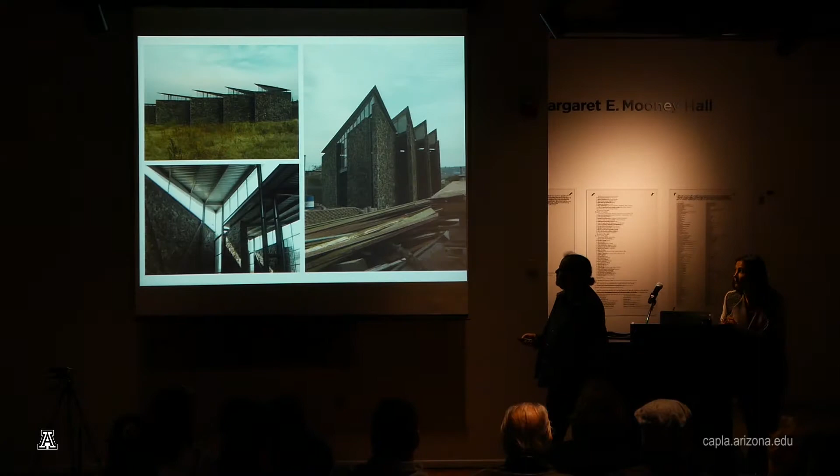For example, this is a place, a working shop, that has carpenters, painters, many people that work for, how do you say, a municipio, like a government place.

And then, how can we work with the same economical money that they use to do a really very industrial building?

So we decided to use volcanic stones, and then we began to really figure out how to make the structure more light, and to know how the materials work.

We really like this kind of image, because you can see how everything works, and how we can get the light, and at the same time have a strong building where all the chaotic things, accidents, can happen together.

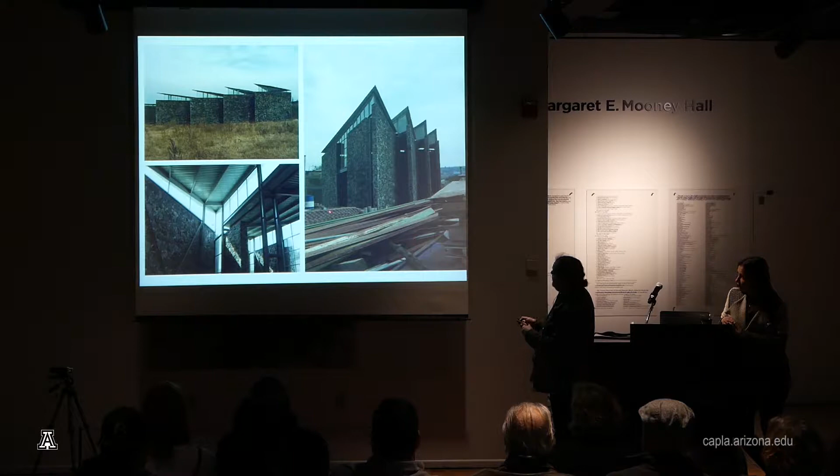The accidents can happen there and be together.

Or this market—we even won a prize with this market, but it's nice because this prize, the Bienal of Mexican Architecture, is usually for big projects, and we went with this very little market.

It's important for our generation, my generation and your generation, because then people say we can do public buildings.

So in this case we talked with the people a lot, about how they really need a market. We decided to make a market where the difference in the height of the roof can remember the tianguis, the old markets.

We see these old markets all over the world, like the popular markets, and how the wind can cross through, facing south and north so you don't get direct sun, and then you can have very nice light inside, and the people can really begin to change.

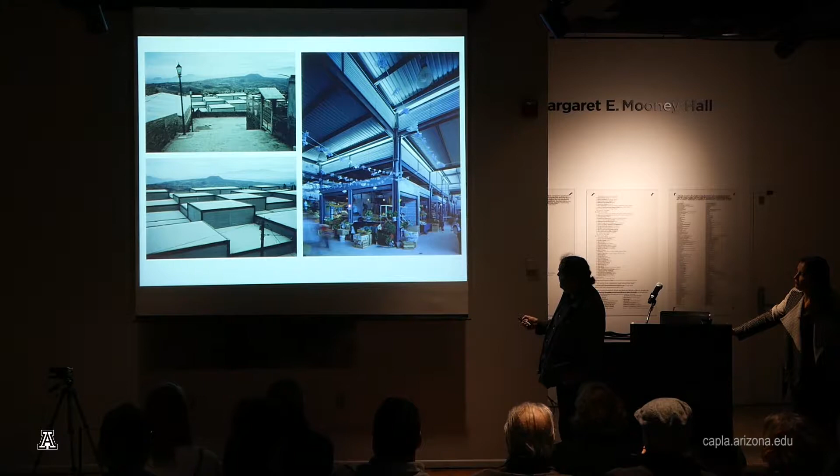One more time, the accident is important, how they can leave the place. Or in this case, we made a school for blind people.

The problem is to understand the other senses—how you touch, how you smell, the textures, everything. So that's why we decided to do something where the sound of the water, the smell of the gardens.

The texture of the materials can be part of it, or even the contrast between shadow and sun can help—not even just the blind people, more for people that are almost blind, that have low vision.

So we worked on that, and on the other hand, how can we play with the same materials, traditional materials like tepetate, which is earth—but you cut that earth and use it. It's not expensive, you can use it.

How can we put it at different heights? So that's, I think, what is contemporary—like in another project with volcanic rock, with tepetate, how you can make those elements work differently. And 4 or 5 materials, that's very important.

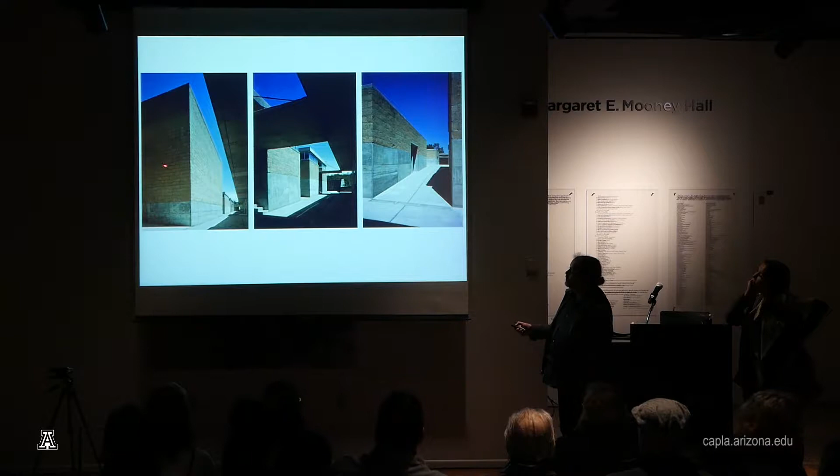That you cannot see in these traditional tepetate buildings, but we can do it under other conditions. The construction quality isn't good, so once more the strategy was how to use tepetate, and with that same tepetate material make the texture of everything.

For example, the School of Arts, we made our first project from earth. The thing about that school is we wanted to make it from earth before doing another project in San Miguel de Allende. So we really looked at what happened here in Arizona, in Tucson, with the wonderful work of Rick Joy, which we respect a lot.

And then how can we do this? We have some people from here that helped us a lot to know how to make it. And then, what is happening in Mexico? They say, okay, you want to make this project? We have 1 month to have the project and 10 months to finish the project.

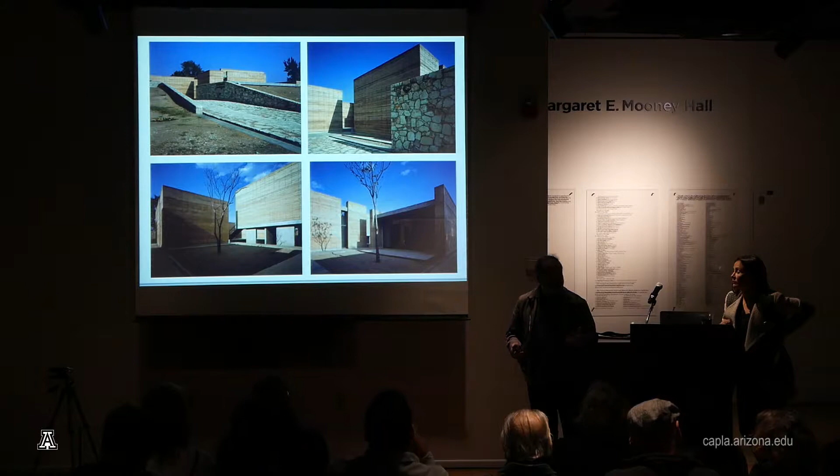It's amazing - like, okay, if we don't do it, somebody will do it. So we made it, and in 1 year we built this project to 2,500 square meters, and because there are different buildings, we could work on them at the same time. That's how we made the rammed earth there. We learned to make it at the same time, but we have that kind of liberty in Mexico - we have to understand how to make this kind of work with these local materials.

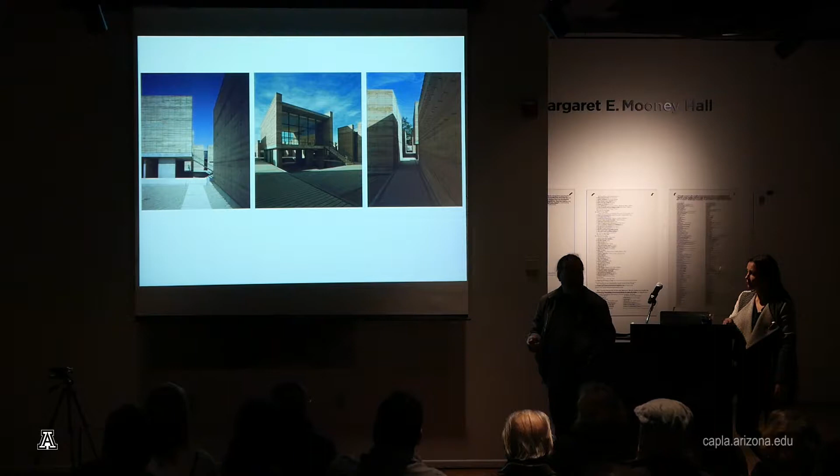We really like working with this kind of material because we love to work with the structure. In Mexico there are a lot of earthquakes, so we can make something to withstand the earthquake because of the size and direction of the concrete, and then we can really build these heavy rammed earth walls at other levels. So how can you really reconstruct the idea of lighting, or the gravity of the material going somewhere? I think you will see it in our work.

As Mauricio said, we want to share this with you as chapters, about ideas that we really love and that make us think a lot, and that make us really happy to work with. So we chose some of the projects, and some of the ideas we love to work with involve topography. We always use it as a strategy - we love strategies in every sense.

As Mauricio showed with the School of Arts, in a way it was also an opportunity, because the site where we were working used to be completely flat, one level. And at that point, as he said, we didn't have any money. What we had was an opportunity - this was a public school, and they were building this reservoir nearby, and taking off a lot of earth from the site. So for us it was like, take that earth to our site and let's try to transform all of these buildings.

We didn't want to have a building at all - we wanted to construct a garden, a whole garden crater. Once you were inside, you could discover the building itself. So again, this was an opportunity for us to understand that taking off all that earth would cost a lot of money for the school, and what we chose was to take that earth and transform the territory.

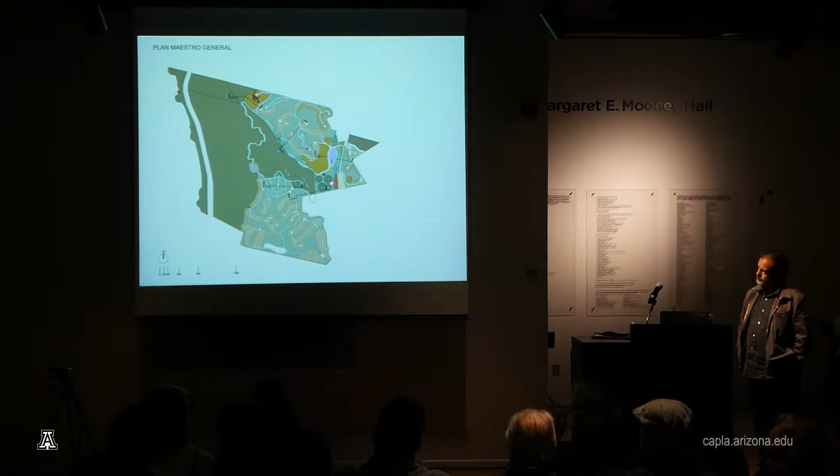This is a very huge territory, almost 100,000 acres. What we've been doing is small interventions across the whole site, and at first we tried to understand where to work, because we needed to design a very small building - a winery, only 200 square meters, which was really small for the size of the site. What we did was always try to understand the north, the south, the sun, the sky - even the stars in this place are really great.

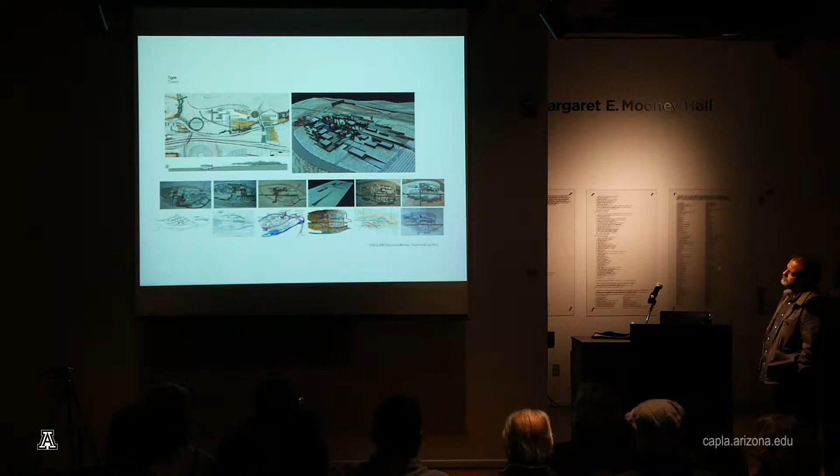Then we understood that there were some olive trees which formed a perfect grid, which was mirrored by the grid of the vineyards. What we did was create a very small building, again understanding the materiality we had, but also playing with a building that was really small while figuring out how to dialogue with the landscape.

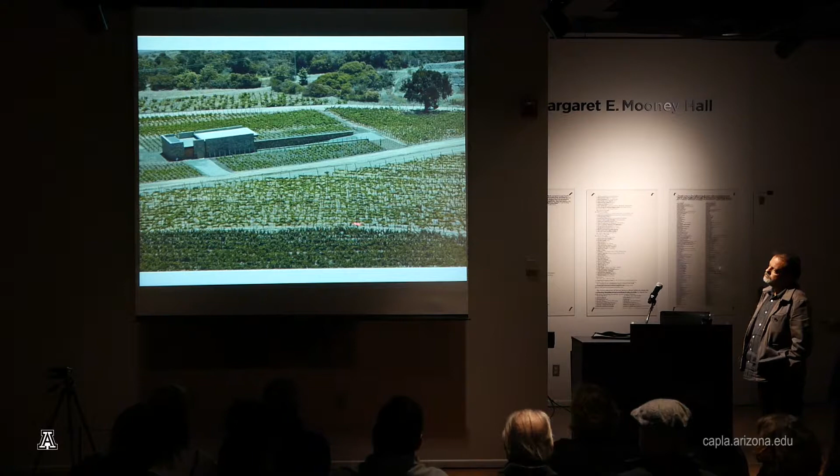We are marveled all the time with the beauty of the sea, of the mountains in this case, and we wanted to grab all the vineyards and take them into our building. As our building should be very close, we thought we would work with the gravity and with the section.

And understanding very simple platforms, the programming of the building itself, and then how at the level of the eyes we could open the building and connect with the landscape. We always want to do landscape instead of doing buildings. We really love this relationship where the building disappears, and what happens is the garden gets inside. All these lines of vineyards became part of the space itself, and now it's an exciting place where weddings happen. It is almost not a winery, it's also a showroom. It's a very flexible space.

The people doing the wine hate us because there's a lot of light going inside the building, but at the end we managed to control it and make it more part of the mountains and what was going on there. We do all these small strategies, but this is very pre-Hispanic from our point of view. We have that influence of just going down 1 meter maybe, and even though you think things don't happen, everything transforms from our point of view.

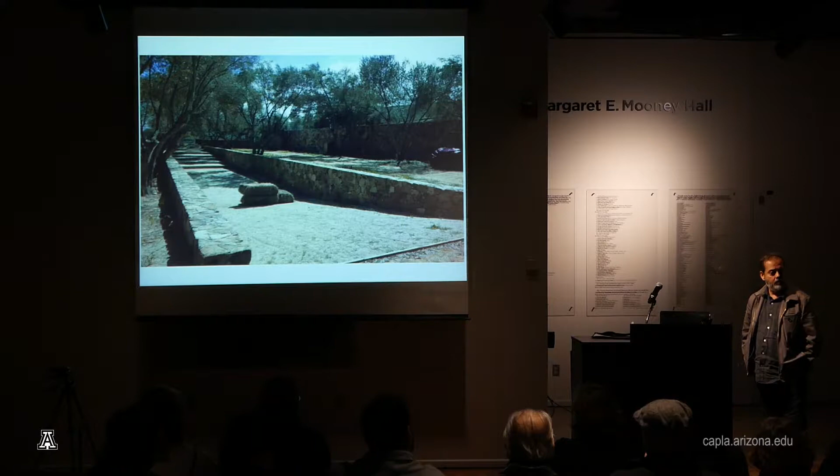Again, understanding the site and the topography of that site, which was really small - this is almost 3 meters high. We developed some gardens of water, which in the real life program is a bathroom, and of course we didn't want to do bathrooms that look like bathrooms. We managed to create a garden of water, then the private space, and then kind of a cinema. Then some structure that disappeared with the landscape again, dialoguing with the topography.

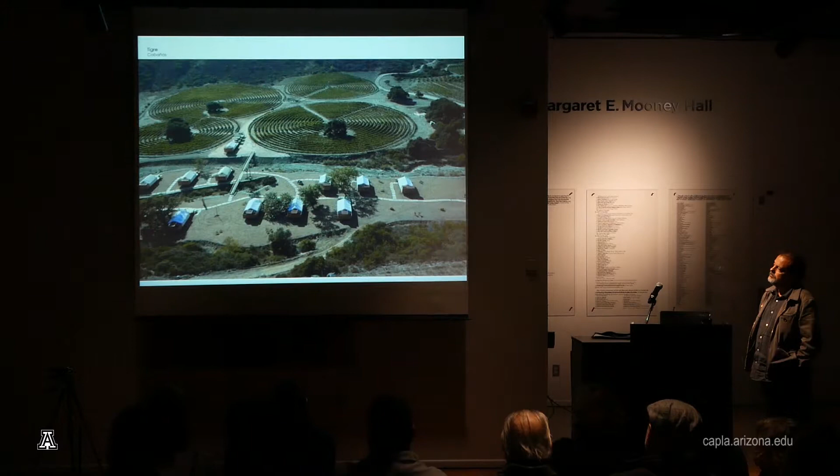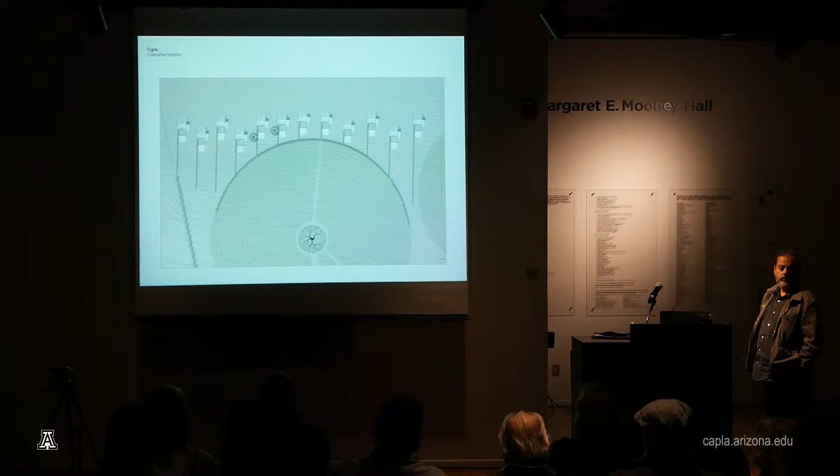And then we did bigger structures, so it is a very nice place where we could experiment with different scale elements. In this case, some cabanas, where the landscape and the vineyards became the vestibule of the hotel, and now we're building other cabanas on the other side. So again, in a space which was already the landscape, we could create something very spectacular - a camp on one side, and on the other something that explodes the architectural experience of living almost outside, creating platforms which dialogue with the mountain.

Here we had two things we wanted to explore: how to get to the ceiling of this room, taking advantage of the mountain itself - so the topographical strategy was important. And second, how to take up two walls which would create a private space up there, so people can spend the night there, because there's no rain at all in Ensenada. So we could create a private, intimate space where people can do whatever they want.

Whatever. Yeah, this is the chance. I mean, this time was so great, and we were just saying that they can spend the night there, and we want them to walk, to have a bath, a shower outside, and be seeing each other from one cabana to the other. And this guy was like, yes, that's so amazing.

So we think we had a crazy client, and we took advantage of that. He also wanted to place, for example, some horses there in the middle of the mountain with a great difference of levels, and we said, how can we do that? We have the freeway here, and we made like a big hole, but again, how to do 16 meter high walls without being so expensive.

We understood the natural angle of the earth, and we worked with that - we just poured concrete and stone, and with that we built some carved element that took off the freeway from our view. Considering that the height of the people in that space would be over a horse, we created that 3-meter height more or less, and took off and just framed the mountains, which is so beautiful.

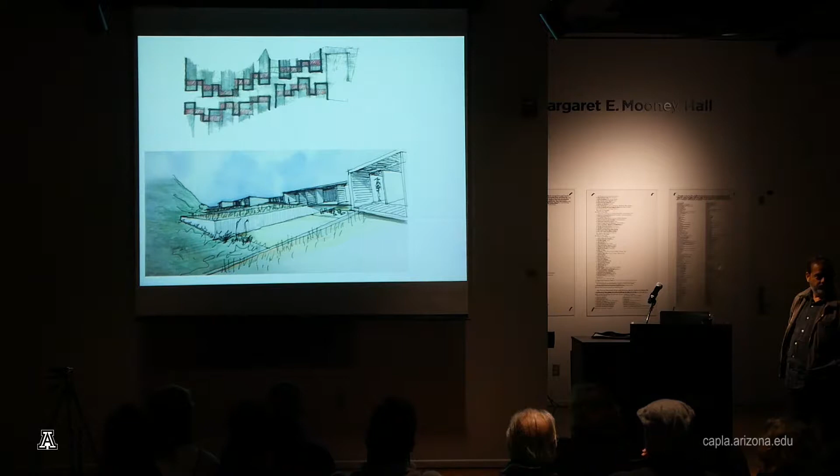So every strategy in this project has to do with that - how to disappear the architecture, how to make this housing project, which is 15 houses exactly the same, never feel that there are 15 houses, never feel that they are houses, always feel that they are almost part of this topography of vineyards. The same we did with the hotel, almost floating without touching the nature.

It is very beautiful, a very similar desert vegetation, very small one, so the architecture becomes very protagonic. So how can we make these mountains be part of the architecture itself.

A lot of people ask us why we don't do organic architecture. And we say, look at that. It's so organic. All these curves and all these straight lines, they're all part of the same thing.

This is a strategy we place in our lab projects, or we like to place with them and play with them. For example, this is a house done in Mazunte, which has almost 35 meters height difference between one spot and the other. What's important is that even though there's almost 1,000 square meters built on this land, you never know it, because we always compose.

In this case, we have the trees, and we wanted to be at that height. But if you see with precision, we are almost 12 meters over the soil, over the fold, and you never feel that. You never need a handrail, even though our clients said, when guys are having drinks or smoking some pot, they're gonna fall. And he said, no, don't worry, the trees will help. We hope. We'll see.

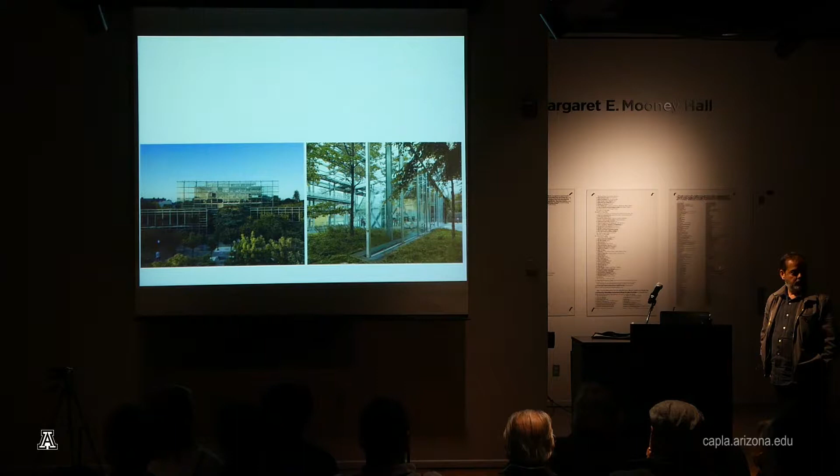So we started the same way, and we want to talk about process. We had to work in our favorite building of Jean Nouvel, which is the Fondation Cartier. They invited us to develop a project, the scenography for the Great Animal Orchestra, because we were used to playing with things that have to do with sounds and things for people who don't see.

So what we thought at the beginning was, well, if we need to work with the orchestra of animals and show videos, pictures, paintings, we want to relate the first floor to the garden. For us, that ground floor level is such amazing, and we wanted to incorporate the organic stuff, so we thought of one material to do everything. At the beginning, we thought of a great circle of brick, just a big topography in small scale to show benches, walls, to show the paintings, the big paintings, to incorporate the art with Adriana Varejão.

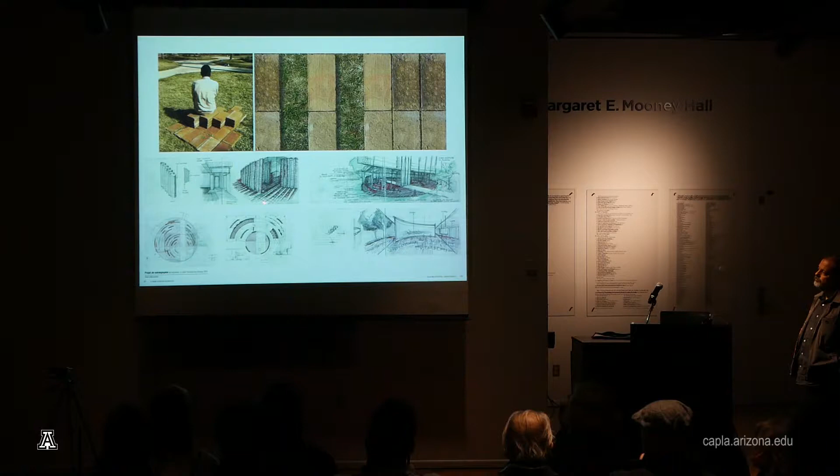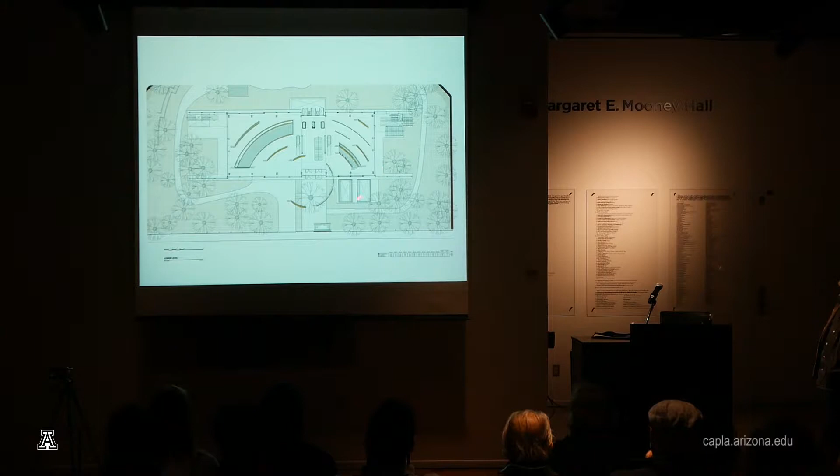We worked the piece. At the end, there were so many bricks that we needed in a short period of time, but we finally managed to create this, and it is an echo of the garden at the same time. We wanted to incorporate people walking through the space, but always seeing the things, not knowing if you were outside or inside, not knowing if you were in front or outside.

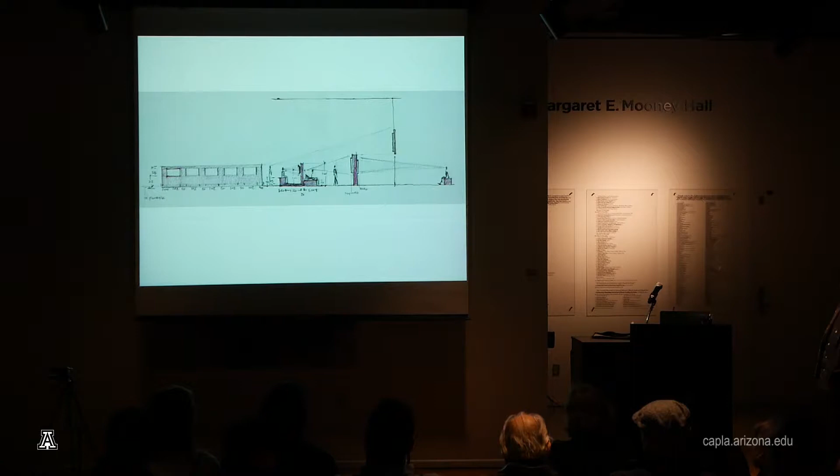But this is pretty much the same scheme as how we compose our architecture, because these paintings could be seen from far away since they were big icons, symbols almost, and we wanted the people to see it because they are part of the Great Animal Orchestra too. So this would be like the scenario.

We wanted to make the glass disappear. We wanted to make it connect to the garden and be part of it in a way. Something also important in our work is to break limits. All the time we are exploring ways to open up our projects.

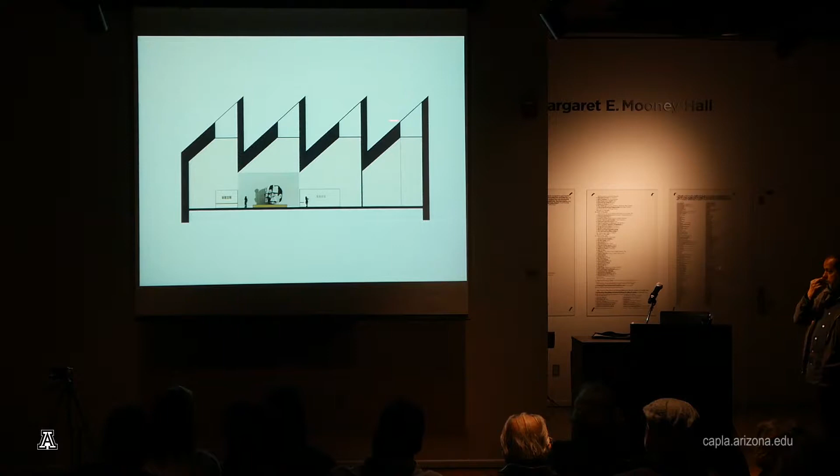In our last project about ephemeral work, we worked on the Jumex, which is a Chipperfield building in Mexico City. In this case, it had a very complex, very steep ceiling with all these elements. And Ulises Carrión, a great Mexican artist, sorry—

He wanted to say that art should be for everyone, should be touched. So we decided we would do a library, and everything would be done in wood, with tables for people to sit and feel comfortable opening the books and feel free to work with them. But also, again, there's the thing of framing—in this case framing the text, framing the books.

As I said before with the students, the materials are just tools. Again, of course we worked first with brick, then we worked with wood in this case, and at the end, for example, in Hermès in Italy, we decided to work with tepetate. Tepetate is a material you've seen in the School for Blind People—we have worked with that, and as Mauricio said, this earth cotton in bricks. We had this project with Hermès. We won the competition, fighting against Francis Kéré. So it was an honor to win.

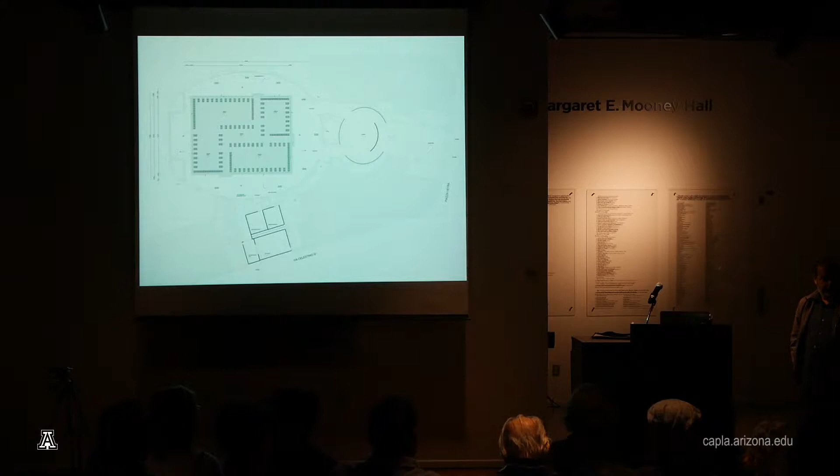Raw. And in one moment they say, make something with raw earth. But they really need something to make it in 2 weeks, and then to put away in 2 weeks. So that's why earth kind of fit. But again, this was an opportunity to explore for us. We want to work with earth, but we need to build it and unbuild it in such a short time.

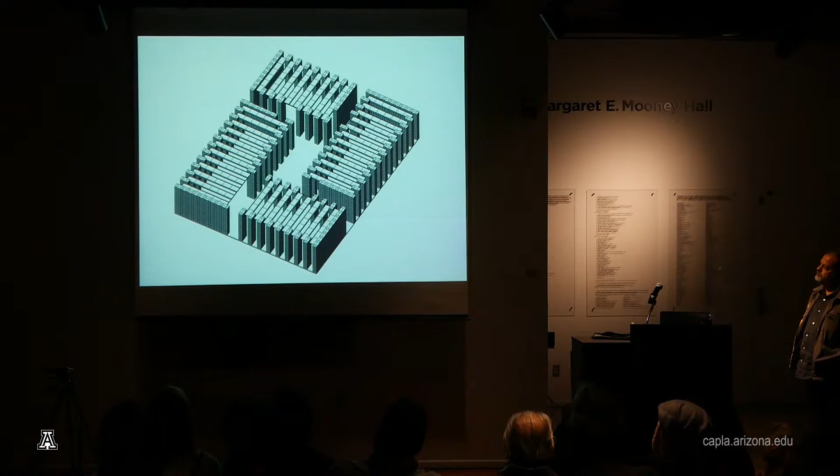What we did is we wanted to work with 3 saloons and then a patio in the middle, and then again with this idea of building columns, very deep columns. But it was a theater, and there was a parking area down there, so every column we designed was like 64 tons each. Of course, the Italians said, 'Why? We can do it with cardboard, very light. We can build it in 2 seconds.'

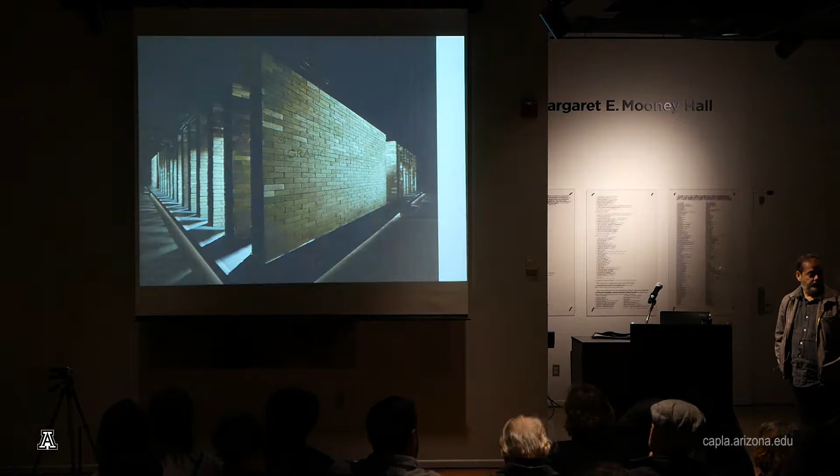We first say, okay, we can put the tepetate, but it's very expensive. We could go to Mexico, to Italy with the tepetate and still it's not economical. But we made investigation and we know that in Italy, in the south, they really worked with this same material. They didn't work with it anymore. Like in Mexico, this is material that they never use again, but this is the tufo. And the tufo is the same as the tepetate, just called different in many different places.

But right, how come this material nobody uses anymore? It's not expensive, you can use it. And then we say, okay, the same one you use in Napoli, that's all. And we put it in Milan and it's nice, because then, right, we use the local materials with the same properties as this, no?

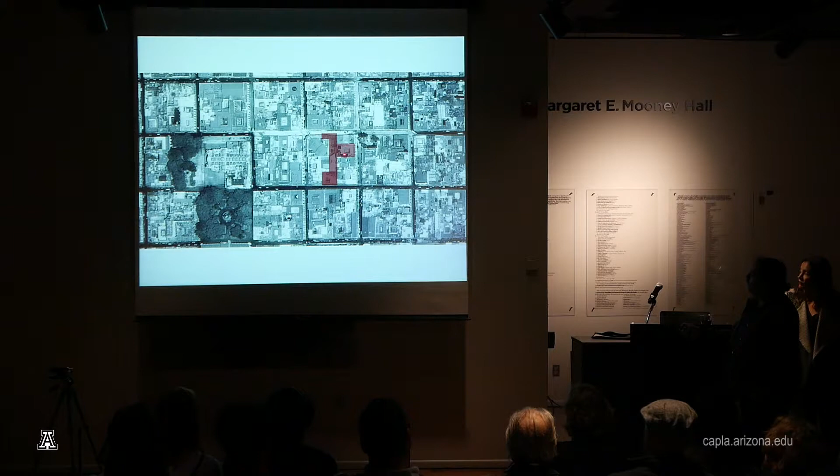How can you really make a cultural program inside? This is the place, this is the new facade from the 19th century, covering the 16th century convent. It was confusing because now it's a hotel and we don't know really where the original place is. So beginning to work there with a lot of people from restoration and archaeology, we began to understand that we had to make an empty space here to remember, and to have once more the facade and the street inside, because we had drawings that showed us how it happened.

This was the place before - nothing, a parking lot. Nobody knew it was a convent. So we began to remove things to understand. Even here, the client began to buy the different parts of what is now the cultural center, piece by piece, like jazz. They'd say, okay, we buy this.

We wanted once more to make a strategy to begin to change it, and we decided the 21st century part has to be steel, glass, very light, because the materiality of history is already in the existing structure. So finally we put in this place that is nice because now it's a public space in a private building. People really work here, and now we have once more the facade of the convent.

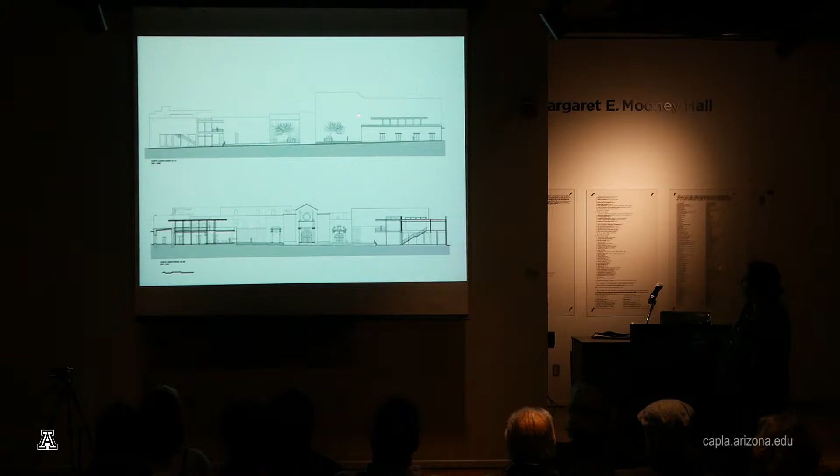As we told you, we make these kinds of acupunctures with new architecture to create the program - sometimes a restaurant, an office, a gallery here, and then in the convent we have the public space where people can really walk, just to walk, even if you don't want to go to the cultural center - you're making city.

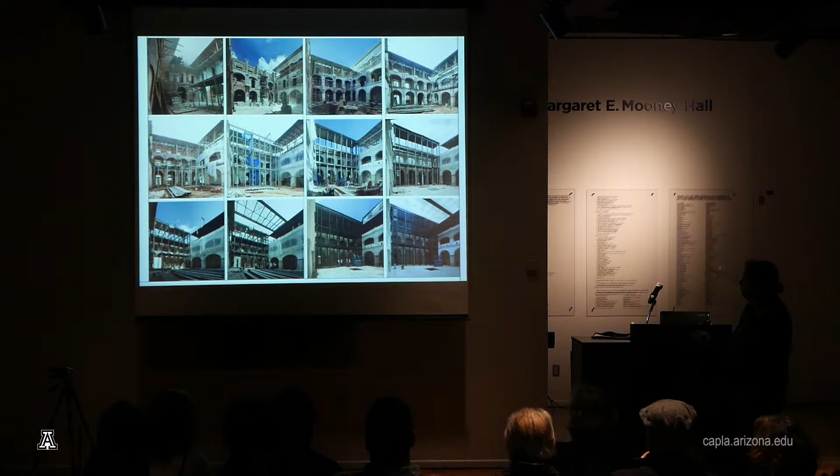And then we took out all the hotel construction that was there, and when we finished that, the only way to put in the new part, because we had almost nothing left to make the library, was to have a contemporary construction there. That's how we really made this. In Mexico, to make something like that was almost impossible at that moment, because the resistance to this contemporary thing was very strong.

But at the same time, because we made dialogue with the authorities, we told them if we don't make this, they will not put the money for the restoration of the other things. That's how we found the place, like a hotel, and that's how we cleaned everything and put in all the new things. Even we made this - remember the roof was from the 17th century, and then in the last part we made it with a darker wood for the new part.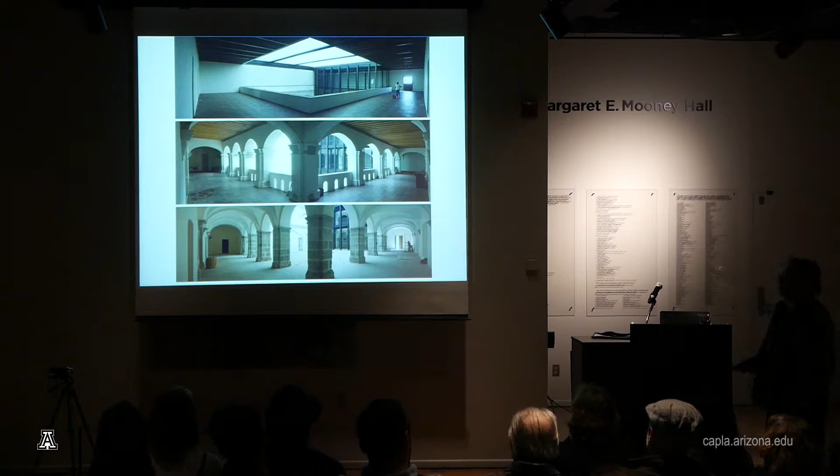This helps to understand where the contemporary part was. It's very important how technology gives the possibility to not have columns, so this roof makes the shadow for a portico for our client, without columns, giving the opportunity to be really next to the heavy walls of the convent. Then we can make the library, we can make a double space. So this is the new part, this is the last part, and how can you make the program now?

We can move the ceiling, so even if it's not raining and there's no sun, it's nice here, or we can do it like this.

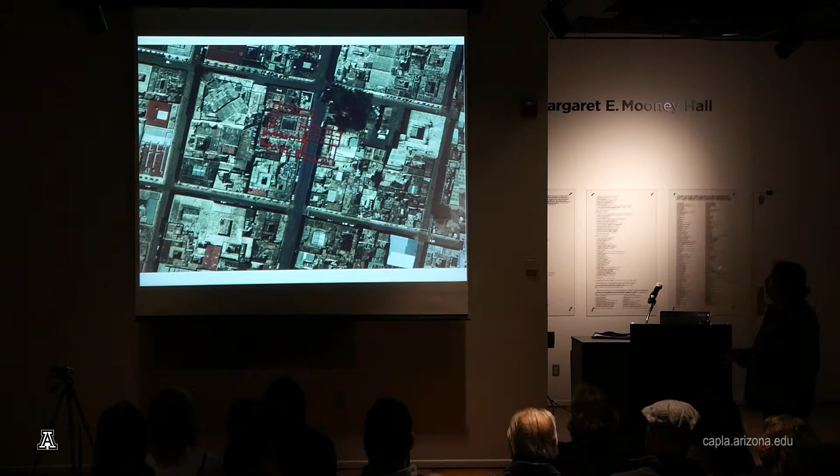Like I said before, that was a convent. In the 19th century, they put this away. We found there really was a convent there because they were changing the street, but we asked them if they could really move and keep the convent.

They said no, we know there is the possibility, we will see in the future, but now it's impossible. So this was the convent, and then because we have the shade, because we have this street inside, we told the client we don't need anymore the facade from the 19th century. We really want to have the idea here of the cut of the 16th and 17th century convent.

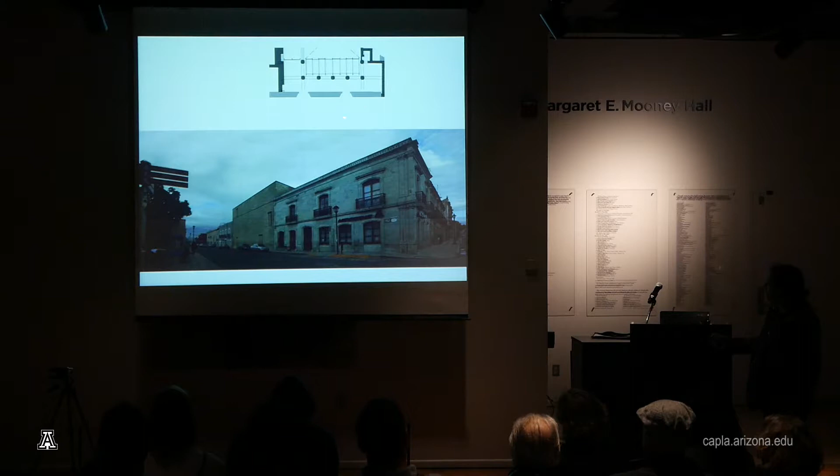So understand, we have the possibility to change. Here you have the portico, the side, and then here before were the rooms. We lost the rooms, so we said, why don't we keep the memory of the cut? That's why we have the doors aligned to get to the rooms, because this part is new, because the convent was only this element, but we don't want to make something that will be very aggressive outside.

We want to make a very monolithic piece to remember the Santo Domingo convents, the Dominicanos convents. Yes, it's a contemporary piece, it's true, but at the same time it's the opportunity to remember what happened in the place. It was very polemic.

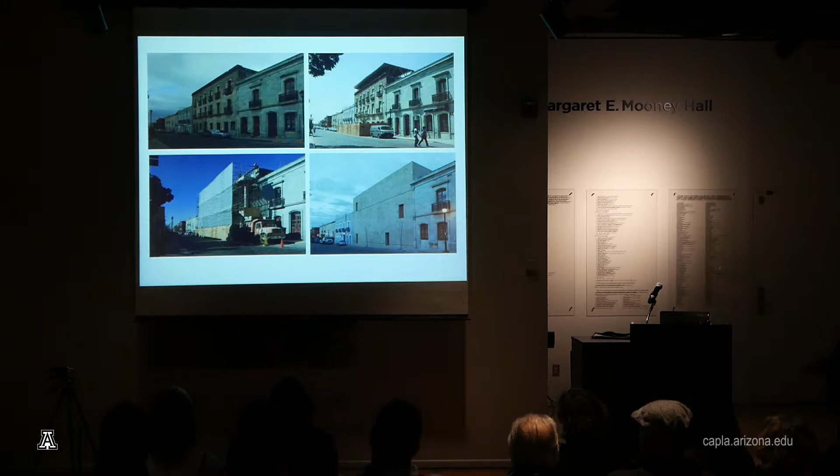But really, we play with beautiful stones, with people working these stones, and we make this piece there. And as I say, we make a public place with the gallery, restaurant, and the cultural center. Every part we go, we make this kind of acupuncture to bridge between the 19th and 17th century. We change some 20th century parts that want to look colonial, but we make something more light to really be doing something not noisy, but new.

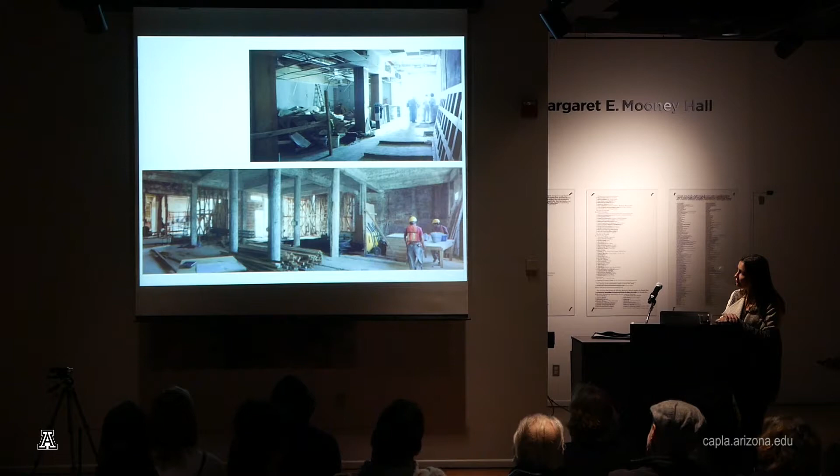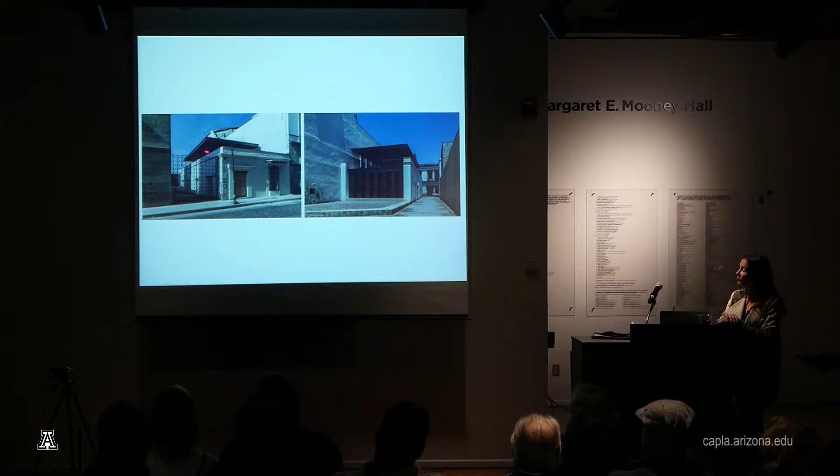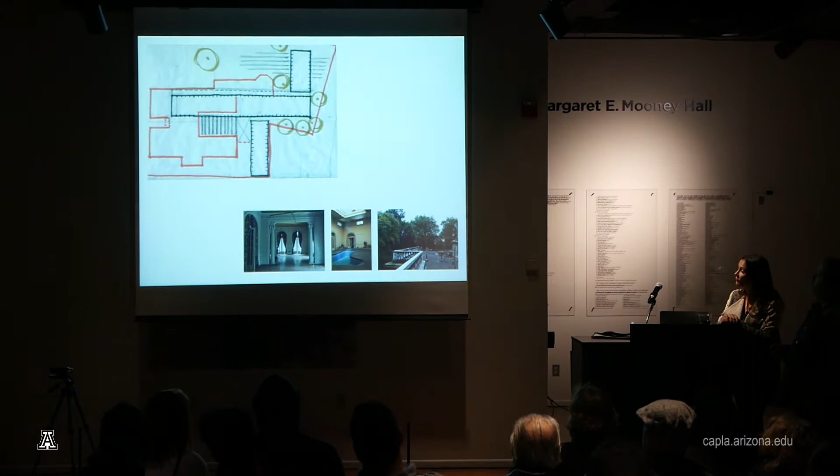And I like this image because it's about having strong the history, but having strong the contemporary position to make a program. And we did the same with a house from the beginning of the 20th century that invited us into a competition. Everything was a very big wall, so we put out the wall. We made the restoration of this beautiful building, and inside we make some part of the building, and in the back another part of the building.

And then inside, trying to create a new patio with a garden we make, and then here you can see how the historical part and the new part can be together to make the new program. And then we make it very strict to make in the house a museum of the house.

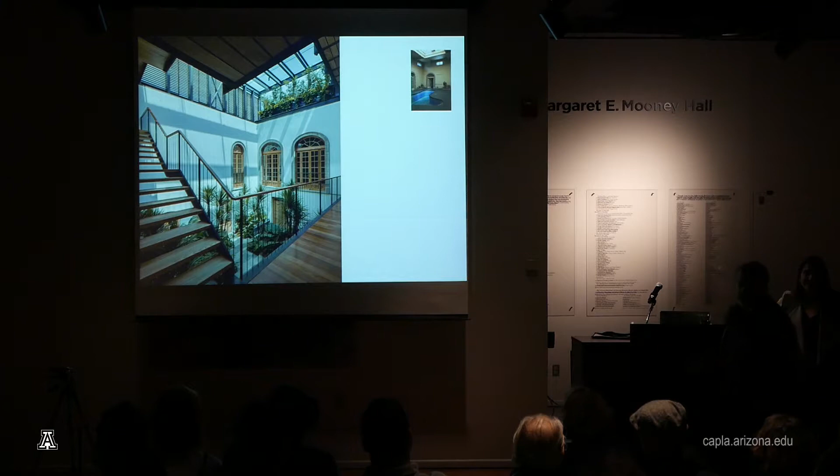There was how it was before this place, because it changed a lot. It was a very nice house, and finally it was like a house for prostitutes, well, in one moment. That's why they... that's why it was good. I think we run, we put out the...

So we put it like this, and then as you see here, what is nice is all this building doesn't need foundations. I mean, it's all very light, and then you can simply rest it on the place. Again, I think the strategy of developing a structure that could float over the old house without doing any interventions in the foundations, touching the house even.

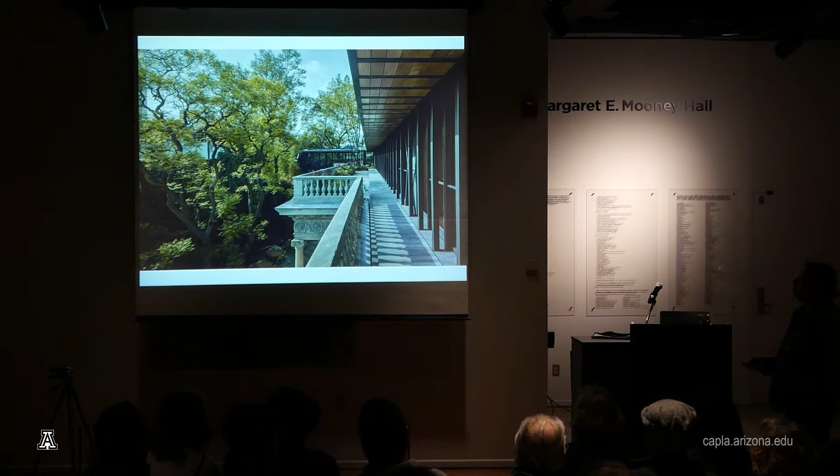It's not being touched. We just place the building over the old walls and make it hang over it, and take advantage of that rooftop that we got, which was abandoned and which was beautiful, surrounded by trees. And then we can do these spaces at the top for the director, for the dean, and you can see the street like this. And this garden at the top too.

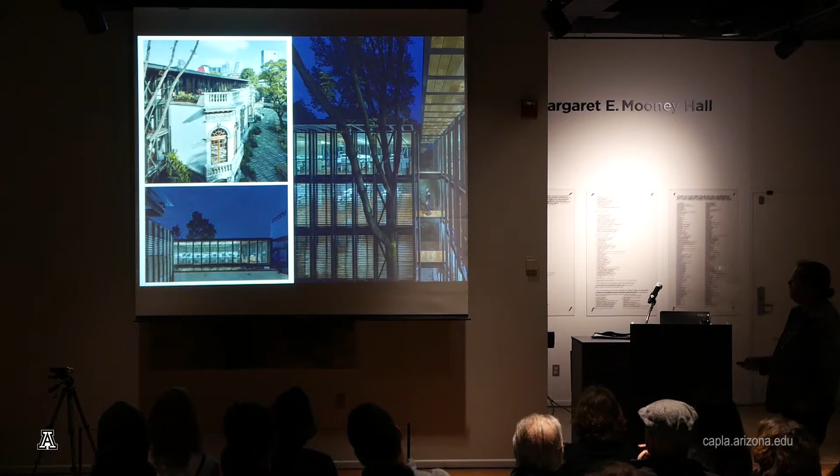And then how the new and the old work in different places. How can you really have the persistence be there, but at the same time make something new. Here is the new building, and then a very strong old building. And this is another one, because here they want to make a photography museum. They have a fabric of plastics.

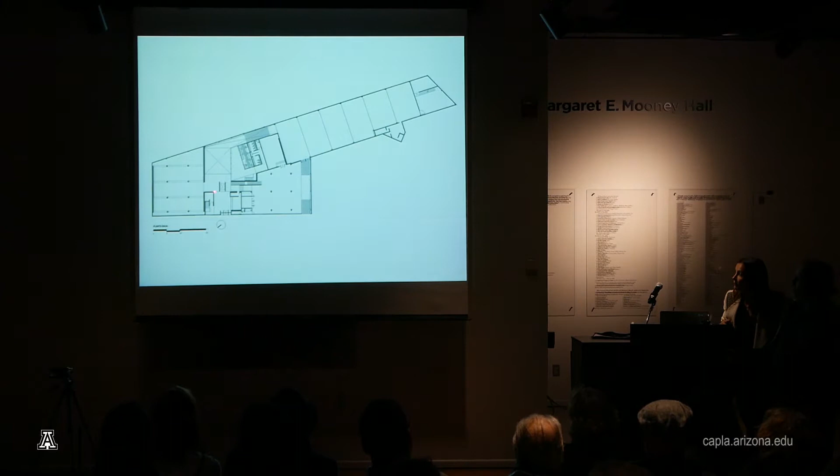It's not important, the architecture, but it's working for a museum. So that's why we say, let us know how can we use it. So we analyze all the building, and then we only put a new part here, and make a reconstruction in the other parts. This is the new part, having a public space here in a poor area.

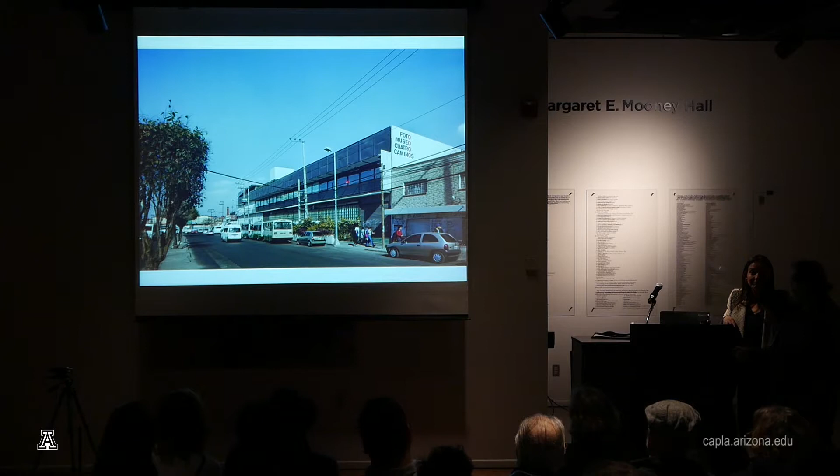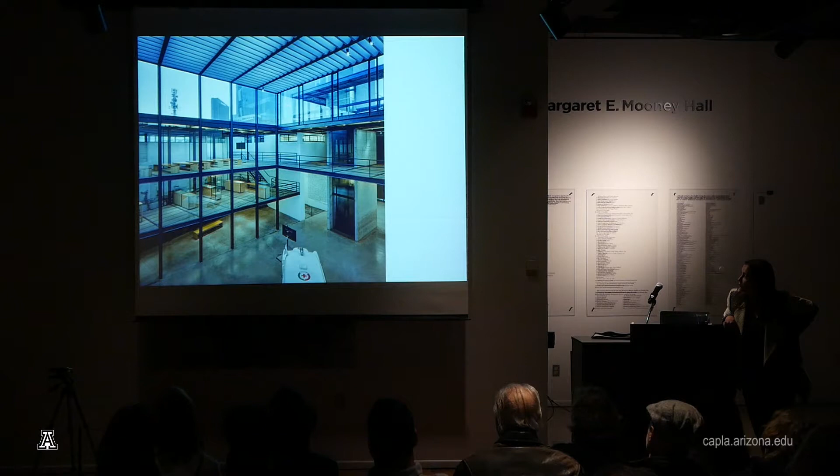Now the people can have this museum, and make the reconstruction of the fabric. It's a fabric for some Jewish people that came from the Second World War, something like Bauhaus, and made this building. So we say, we like what happened with the building, just trying to keep it strong. And then inside, we make the new part very light, but we design this kind of roof that is very light, without money, still working with this idea of fabric, control of light, very good height, because this is the central part of the museum.

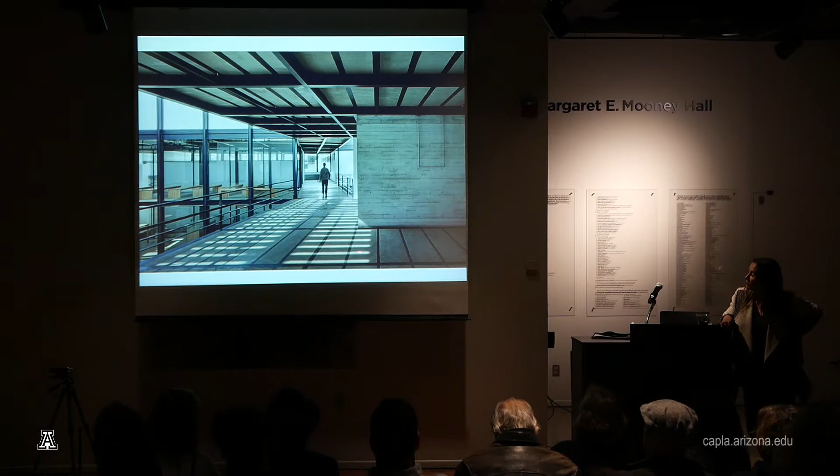And then you can have open galleries to do whatever you want, and then you have the other galleries in the other part. And we love really to work with new ideas, how can we make these kinds of roofs where you can see the facade of the roof on the top and here. And then we can reinforce the other places and make beautiful galleries here.

This is the other place we use now, that I showed you in the beginning, and you have open or beautiful light from the north for whatever photography exhibition you want. This, I have to say, is not a traditional photography museum. It's more with new technology to have big photos, etc. And in the roof we can have a place for cocktails. So finally, we have this lecture room for what happens with the new architecture.

The other things that we will talk about, which are really important and connected, might not be similar, but senses, materiality, and politics are things that we want to incorporate in our projects.

I would like to talk a bit about this building, a project for the blind again. It was a library, and a beautiful project because we needed to work in this old building. The library already existed, already for the blind. The first moment we started to work here, we were sued by the blind people, because we closed the library. It was kind of funny because we understood our client was very protagonic and wanted to be there.

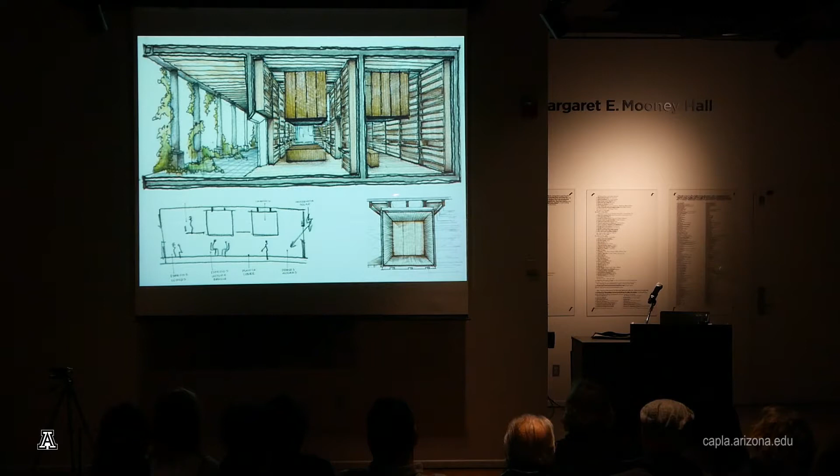In this case, the sound will be the guide for people to understand the place where they were, and to create some cabins where everything could happen, because we understood that a library for blind people is very noisy.

So then we composed the garden with Jerónimo Hagerman, who we have worked with before, and we designed these kinds of beds for people to do whatever they want. We have seen people doing massages, Tai Chi, playing chess, having dinner, or even food—a multiple use space.

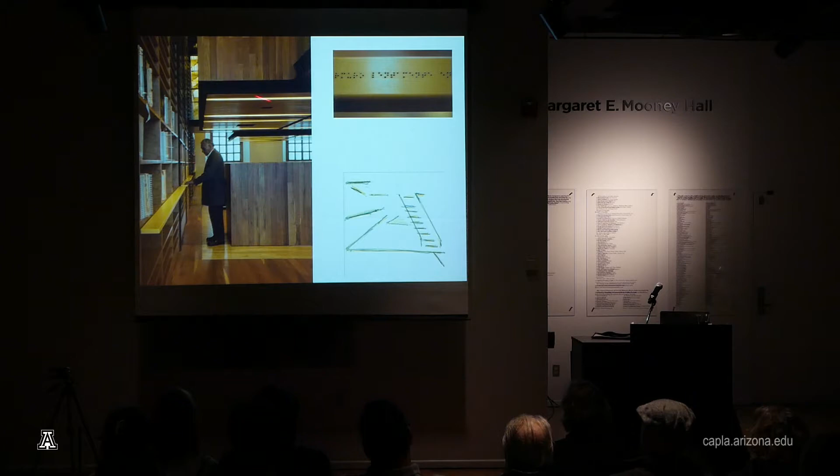And then again, we worked with all these elements which we love, the colors and different textures of the wood. In this case, yellow, which is the best seen color for the blind, and of course braille, with yellow incorporated in the lights, the handrails, the rocks for the kids. There was no program for kids, but we wanted to create a space which was common for all.

You know, a space which would not be just for blind people, but also for people that can see but can hear and create an atmosphere. So we thought we wanted to create some sound scenarios, soundscapes.

So we designed a very specific sound atmosphere with different speakers, own speakers, group speakers. This plan is showing the sounds. And we wanted to work with a labyrinth of sounds, almost doing nothing with a free space, but once you walk through, you discover the space. That has to do with all the work we wanted to incorporate, even in a project building.

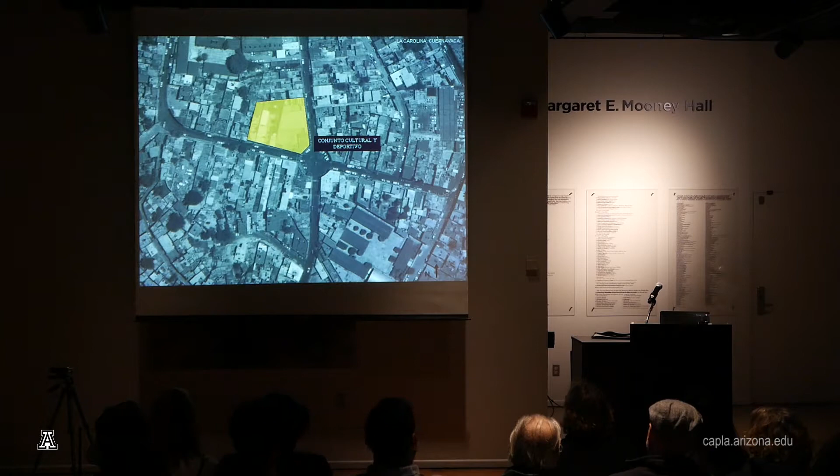And then talking about materiality, here we designed a cultural and sportive center in a very poor area in Cuernavaca, and there were very difficult problems, social problems, drug dealing, very complex position. We had this beautiful site in the middle of a great topography, again, no public space. In this case, the cultural agent was very important.

She showed and understood that there were a lot of orchestras. Again, the sound and the big groups of people playing noise and sound and music. They didn't have a place to play their music or to rehearse. And what we did is we said we want to create a big void in this big space and put all the workshops up there.

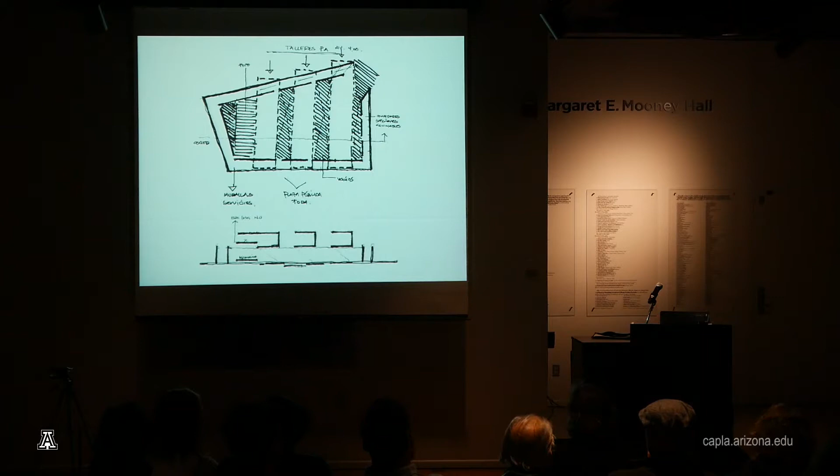The climate in Cuernavaca is, the sun is tough, so we said the buildings will be a shadow at the same time for this voidness, and we can use the same strategies, open ourselves to the north, get the light inside. We don't have money, we need to work with intelligence, how to let the wind get inside, let the light get inside, how to create a voidness with shadow, how to create a garden next to it.

How to play with the topography, which seems to be the same level, but all the streets were at different levels. So take advantage of that and say, well, the skaters can play with that, and we can create some ramps and create a space for the football players. We can create like a football area.

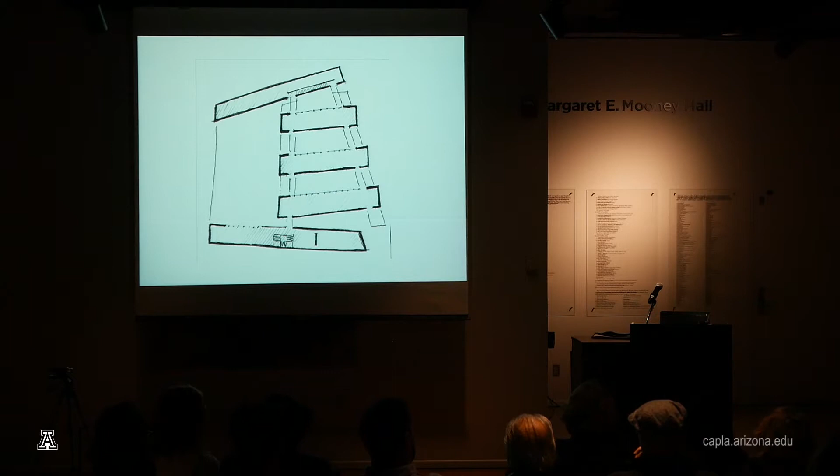Of course, Mauricio was like, no, this is not the shape of a football court. But I mean, at the end, it was very thankful for all these people because they can finally have a space where they can take advantage of.

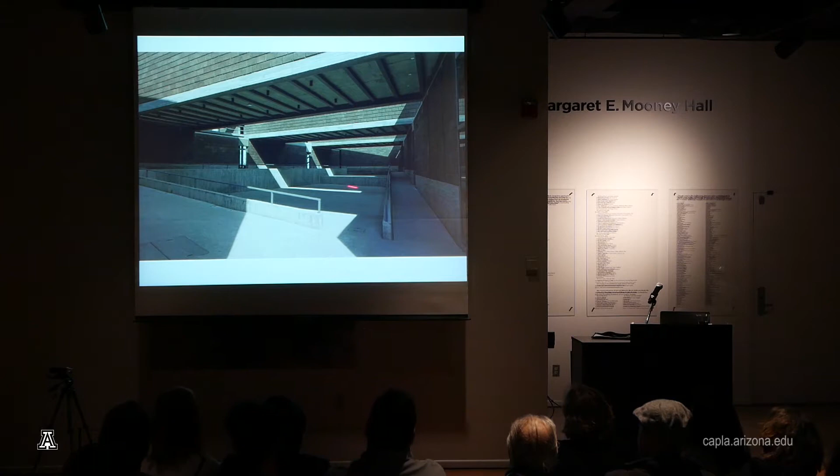And we place all these kinds of beams, which are buildings, but at the same time the workshops floating over this space. And the thing that we love the most is how to compose, again, playing with the heavy stuff, placing it floating somewhere, but also how to play with the light and the sun and the shadow, and again, the ramps, and make them part of this scenario.

This is a cultural space. It is used by the people of the community. We wanted to take advantage again of being inside, outside. The terraces are the vestibule of the studios. The library connects with the garden, but again, just to see the garden, but to have its own space.

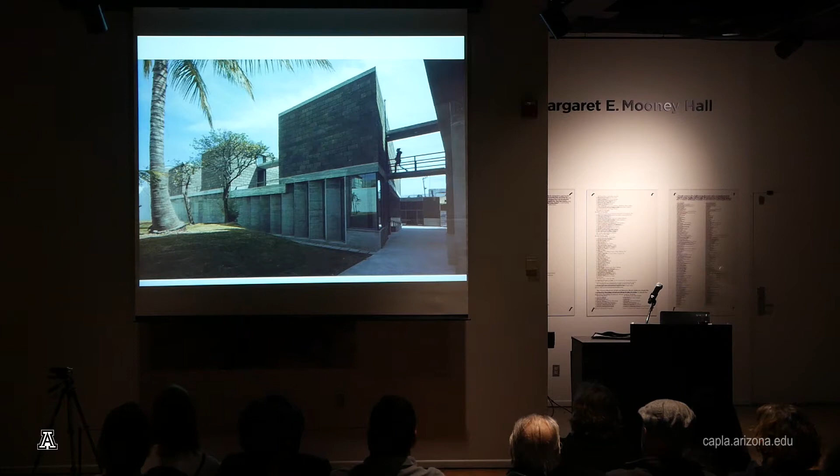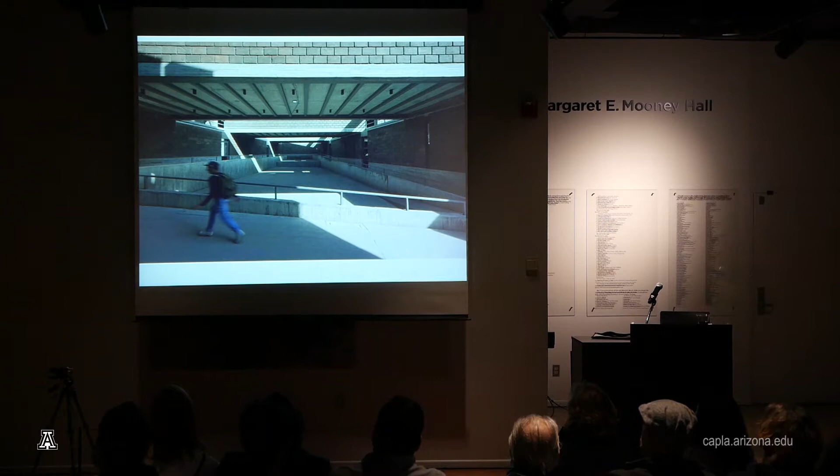Again, the play of the light is very important, and of course, all the structural elements. We took advantage of every project to experiment and explore the structural possibilities we have. So we did it also in this case, putting the tepetate, in this case, chocolate color. The name of the site is La Carolina, and to put the heavy and the gravity up there, and play with that.

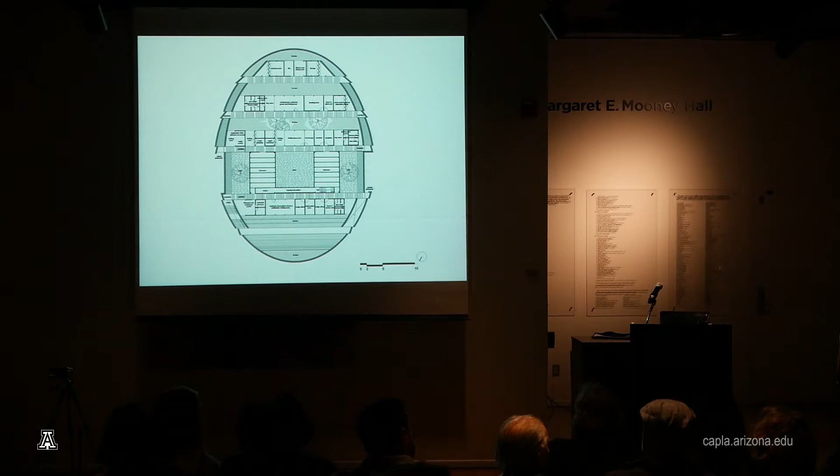And again, talking about memory, about topography, about tectonics and materials, we had the opportunity to work in judicial courts for 5 years. We got exhausted, threatened. It was so hard. But again, working in public buildings, in this case, what was our biggest advantage, not only the materiality and the opportunity to work in this type of site.

Which, as in Pátzcuaro, we got again the stone, we got beautiful clay to work with. In this case, it's the opportunity to be political with the work we do. And we think that is really important in our work all the time, especially when we talk about doing walls and dividing and creating difference between one another.

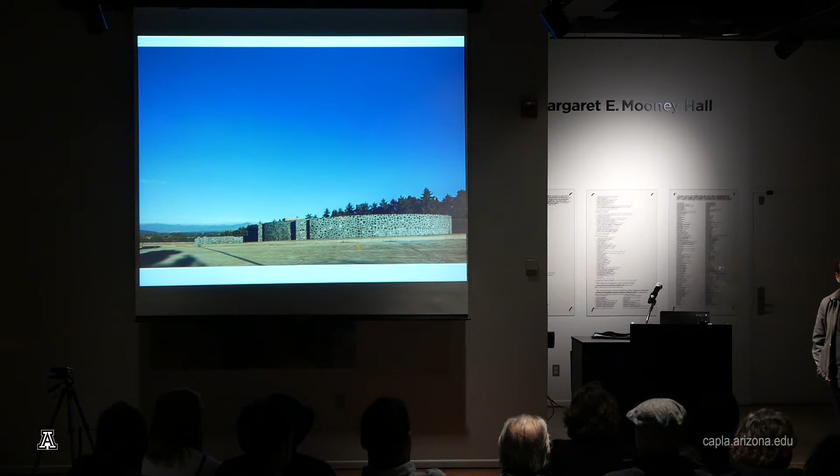In this case, we needed to work in courts, but these were spaces still of hope. The people who are here are still in a process. So we wanted to talk with the buildings and say, all the public buildings in our city are terrible, all the judicial courts are terrible. And we had the chance, because the justice was changing and everything changed to oral. Orality was an opportunity to think how a building can talk now that everything used to be written.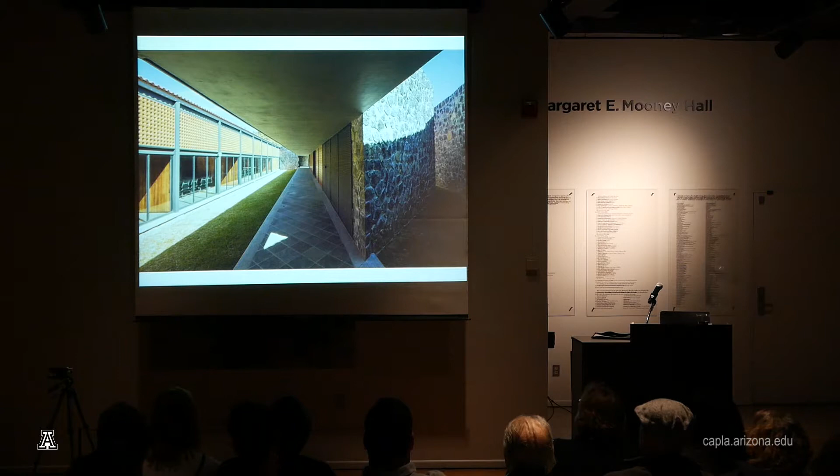And we decided to create these pavilions, everything very transparent, with a flexible system, working with the limits. We love this idea of working with shadow and very constrained spaces, but also open again to the garden, letting the light inside, and playing with reflection and with the light itself, never knowing where you are at all.

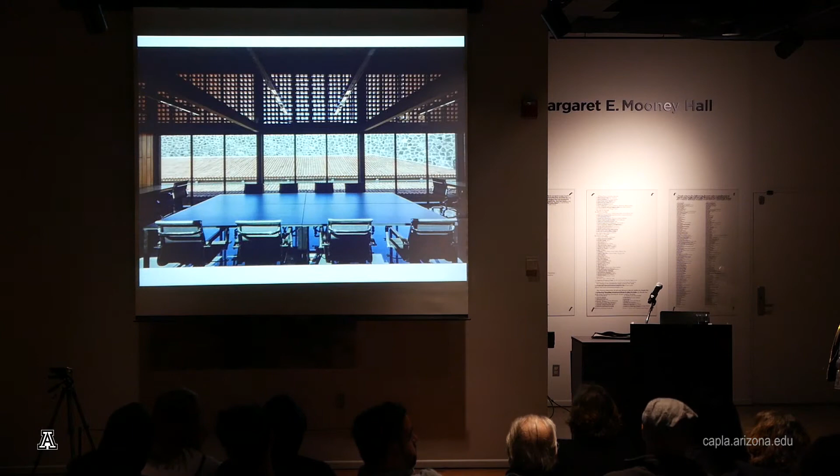And even though there are public buildings done, which need to ventilate naturally since they don't have air conditioning, we understand where the light goes and how to create a landscape with the program itself.

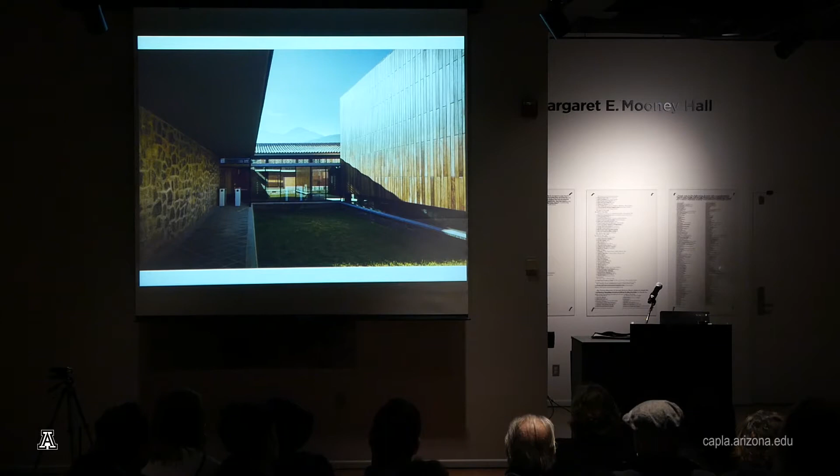These are the areas for the supposedly guilty people, but they became a landscape at the end. They have their own garden, and there's an opportunity to deconstruct the space and play with the politics, because we really think we need to say something. This was the opportunity to say to the community that justice in our country is changing, and it starts being shown by the work we're doing, showing that the difference between the area of the guilty guys and the judges is just light. There are no bars in between, just light.

What is really important in the last two projects is how we begin, but in these two projects you can see how important it is that architecture is political and ethical. How can we take advantage of the program and change it for this kind of adventurous program, while at the same time, when we talk with the people, they say, yes, we need a place to be cultural, to have our own place to dance, to play soccer, to spread out.

Then the people were very happy with us. One time I was there, and there was a little tiendita, the store, so I went to get water and I said, hey, how much is it? Nothing. Why? Because you're making this for us. And when you receive this kind of giving, you say, this is the thing we have to do.

And as we see in the other projects, the last two, the light, the texture, the materiality is something we can take advantage of, to have this kind of atmosphere, that experience you need between going inside, walking. The architecture is not an object, it's an experience. It's a place to be, and you have different lights.

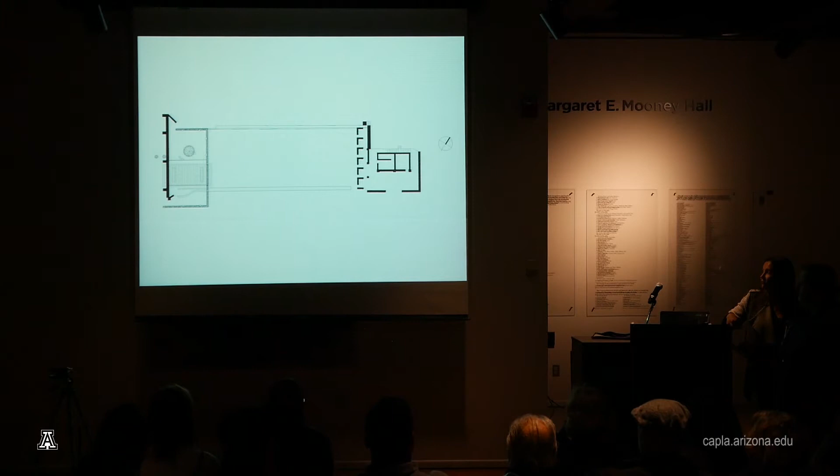But when we went to the place, we found this wall, this tree, and 2 rocks. And then we understood that the real persistence we wanted to see was the tree, the 2 rocks, and this wall. We said, wow, maybe it's not like the convent, maybe it's not like that, but it's a strong persistence. So how can we deal with that?

Even though they said to make a pavilion, at one point we thought, oh, we could do something more formal, but we remembered that the important thing in architecture is the risk of being unseen. And we think in our architecture, we want to work with that.

To not see us in the landscape, but when you are inside, you can have the experience. And if it's strong, we make the good things. Like in this case, we decided to make one wall, the other wall, and then make little holes between the rocks, which are unseen.

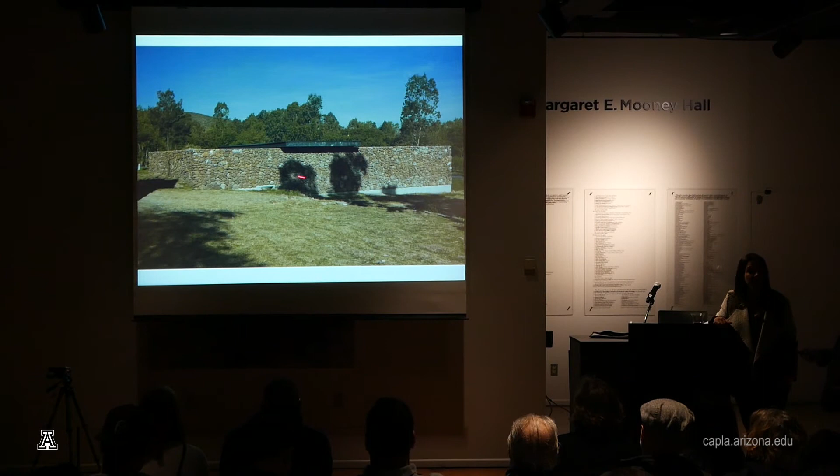But depending if you're a child or big or whatever, you can see outside and you have shadow, a place to be. And then maybe some people that go to the place say, where was your pavilion? I only see some ruins in the back.

So this kind of stone reminds of these beautiful walls that the campesinos, the farmers, make to divide their land. We call it tecorrales. But when you begin to see that you have this concrete, this hole, then you begin to see that, okay, this may be other thing. This is the old one, this is the new one, this is a hole, so this is what happened there.

And then you go, you see a shadow, and then you go inside, and then you remember one more time the tree, two rocks, and that wall. And now we have this other wall with the bocinas, the speakers, and the shadow.

And then I really like this project because it's the opportunity to say, wow, with a floor, a roof, and a wall, we can make space. And everything there can happen, depending on who will live there, what programs they want to make from the museum.

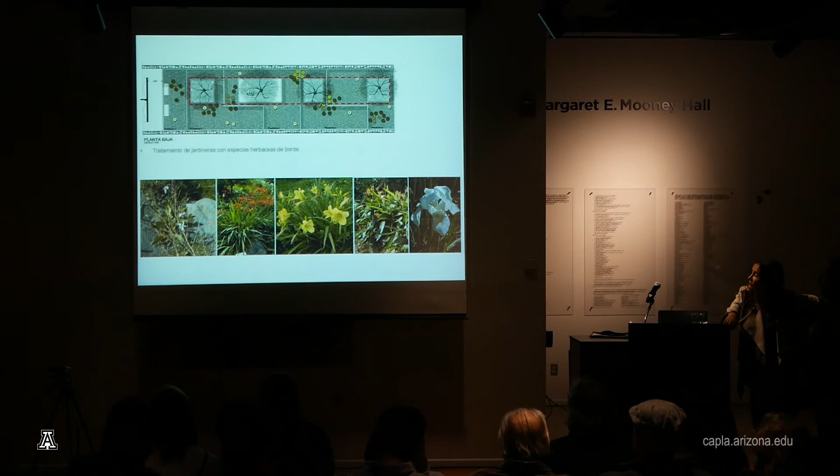And then one more time, how can we play with the natural landscape, doing a water garden, and there are the olives, over there. And then, one more time, the experience. You can walk, go inside, walk over there, and then in all the experience, to go to the bathroom, you can see it.

Then, one more time, the experience to play with materials. Now the light is important to think about the structure, the lighters, everything in our work now is really wood, in other moments stone or ground earth. How can we make this reconstruction of the building, but at the same time give you an experience and very important emptiness, the voidness that gives you atmosphere.

And when that happens, I have to say something like alchemy, that when you begin to think in that, you are not thinking anymore in form, you are thinking in... it doesn't matter, it doesn't matter.

So that's why finally, we can have this experience in the patio, we can go to the place and then feel the sound of the water, and then if you go up, then you have a garden.

Anymore a bathroom. I mean, you have a garden for people. The fifth facade is really a garden for the people, it's on top. And that's why I think even if you have a small program, even if you don't have money, because they were really expensive.

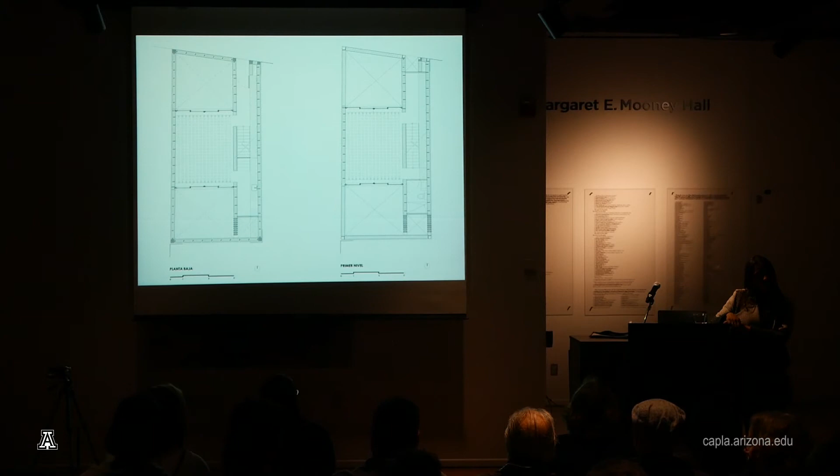So we decided to make two patios. But she said, I want the tower of brick. I want a tower of brick, but I don't want to see outside. Tower, brick, don't see outside, okay.

So we made two patios, three levels. Here is the kitchen, bathroom, and then we have 9 meters high, a library to have everything, objects, archive, books and photographs. And then the opportunity to have this north-south experience. So outside, this is how it works with the community, very close to the other house we showed you before, from my mother.

And then we made something without concrete, which is the celosia. I don't know if celosia is... it's like a screen, a screen for the wind, and the sound can go inside.

And then how, really, with only steel every 60 centimeters, you can make something for the earthquake. You can see here how it works in horizontal, this steel. It's almost like the Hermes pavilion we worked on too.

The Hermes process, the structural investigation we developed, helped us develop this one, because it was pretty much the same, working just with steel, and how the form and shape of the perimeter of the volume we were working with could work without concrete, so we could take it off. We don't have any columns here, so everything is structural. Again, the ephemeral work helped us understand how to apply that to these buildings.

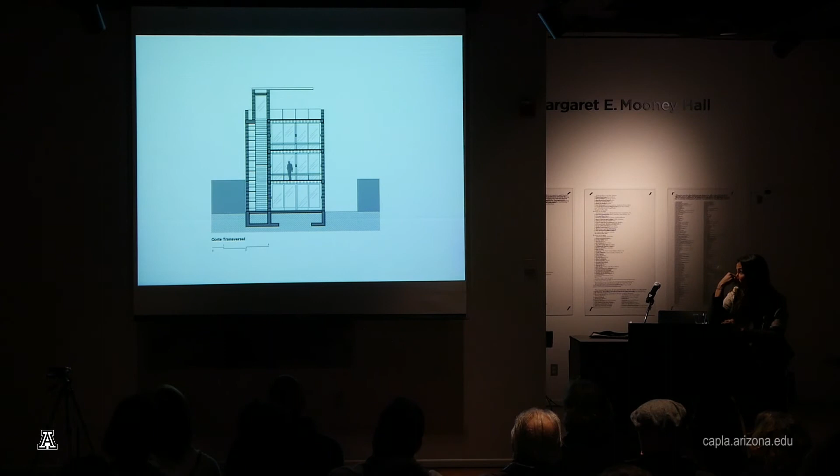Here is the section, how it works, and then how you can manipulate the light to have different experiences. In this case, obviously you need only penumbra, like Barragán, almost no light, to better highlight all these kinds of objects.

And how can you respond to the neighbors? So here you never have holes, and here you have holes, no? And every time you have the first floor, obviously you don't have holes because you need the privacy. And then we can work with that.

I mean, we can really make with the same material, artisanal work. These workers never made this kind of brick before, but we made a wall. They said, okay, for one month, okay, like this, I like it. They understood, and they made it in 3 or 4 months, all the walls. What's incredible is how they learn really fast, and the nice idea is how we use this structural thing to not have concrete here.

And then we have this experience every floor, because if you have only a 6 by 5 room, but you can have 2 patios, you have a 15 meter long distance space. And then this happens one more time, we have not more than 3 materials: the brick, the wood, the concrete.

And every part, because my mother said first we can have white walls, but later I told her, can we work with the whole building in brick, and if you don't like it, we can make it white, like this, and she said, okay, let's do it. And now she likes it, because then you are in the same skin.

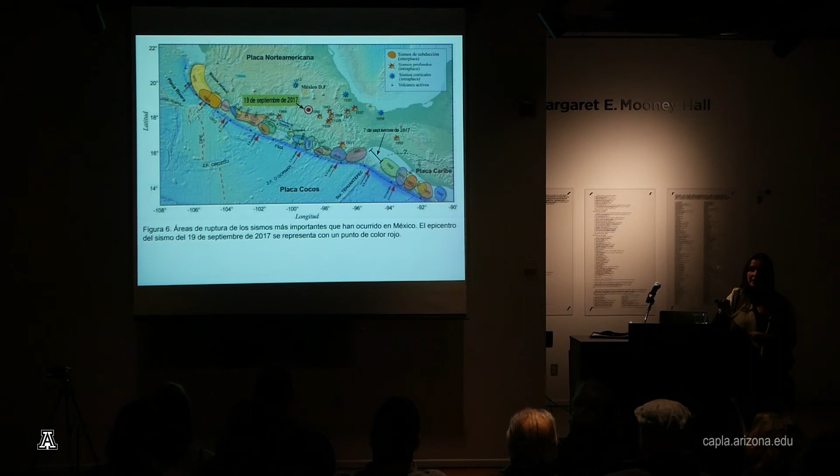To finish, we would like to show some images of the land where we work. As we have said before, we need to observe our territory, to understand where we are working, the vegetation, the light, the earth. And we work in a territory that moves.

It moves a lot, and it has caused a lot of damage. Last year, a lot of constructions and old buildings fell down. A lot of the history and memory of the place has been stolen in a way, maybe because of modernity, this want to be modern, people feeling they are not secure living in houses made of earth, but also the concrete fell down.

People live in different types of communities, and we try to understand how they live and what materials they use. For us, it was a year of trying to understand a bit more about the way of living of all the land around us.

As I've shown, there are people living by the beaches, in the woods using a lot of wood, and in historical sites with housing 300 years old which fell down, not because it's bad to live in earth, but because they didn't give maintenance to these elements. People were throwing their houses away.

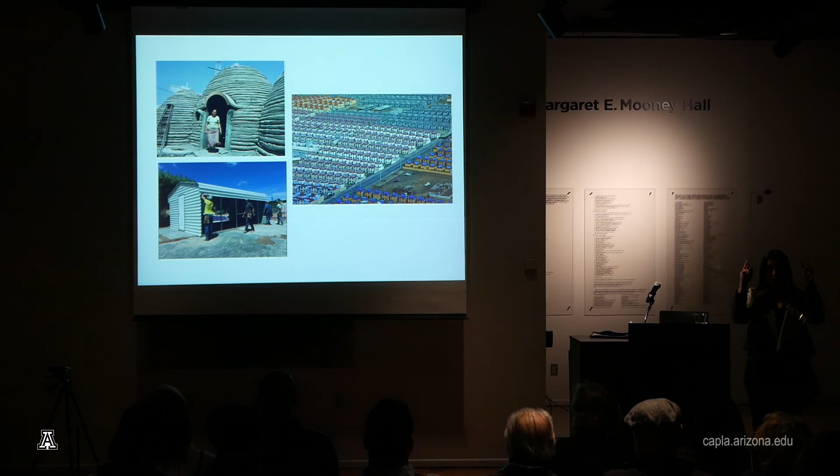They invested a lot of money and time to tear down buildings because they were scared, because there's ignorance around. It was an opportunity to see how important the participation of architects working here might be, and what would happen with the developers—it's a business all around—and what architects with brilliant ideas can bring to improve housing.

We are scared of that, because we think we have forgotten to observe and understand the territory, and to understand the culture, and to think of the opportunities we still have.

We invest a lot of time, maybe not designing gorgeous buildings, but working with the communities, working in schools, developing workshops like how to make bricks of earth with students, trying new samples to communicate that living with earth elements is secure, not dangerous, that people should take care of their history and memory, and that we could create small, subtle elements made of wood that they can fabricate themselves.

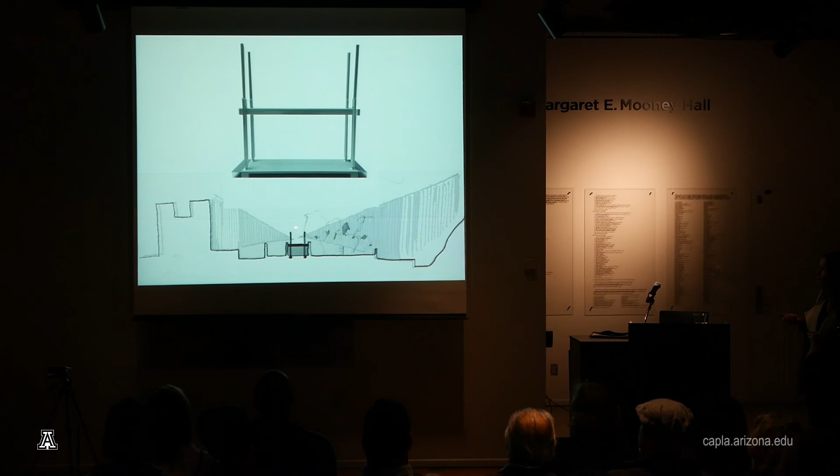Because auto-construction is something we have in our country—95% of the work being done is not done by architects, thank God—we can see how they reinforce structures, have the opportunity to see things they have forgotten, and create a structural section that might help them. At the same time, that's the participation of our work.

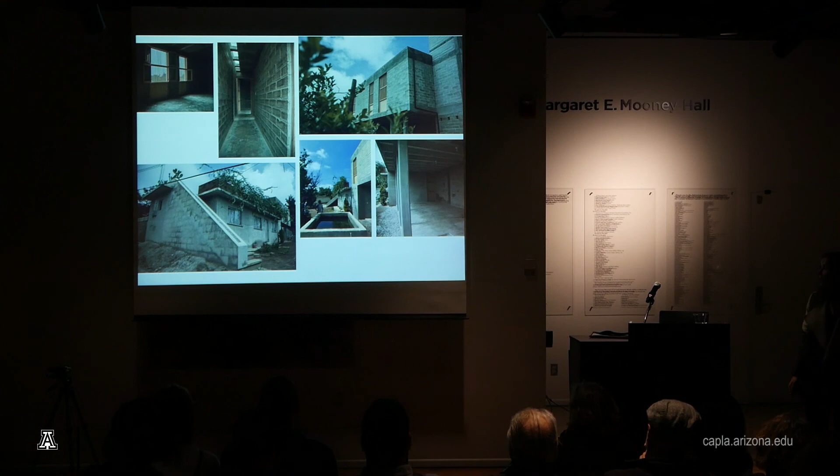If we need to do something, the important thing to share is that we should stop and understand that the pileta de agua is still needed, that the fogón, the fire to warm a place, is still part of the culture, that not everyone lives the way we live, and that maybe taking the opportunity of the ceiling they already have, or just getting light inside, are elements we want to work with and make part of our work.

This is a photograph of the model. We put it here because it's in Chalma. It's an inspiration because it's about construction, about the people doing the buildings, as Gabriela said.

We think it's good that 95% of people make their own houses, because they have more freedom to really build 1, 2, or 3 floors, rather than being limited to 60 square meters with a lot of money. What we have to do as architects is acupuncture.

I mean, something that helps the city change—cultural centers, even houses—through this idea of working with the city, with the community, to do things. The organic nature of the cities should still be part of who makes it, as it has happened throughout history, in every part of the world.

So, once more, understand through observation the opportunity to see how people work, how they really make beautiful spaces, patios, streets, expressing the essence of the culture of the people working there. Understanding that helps us apply these contemporary acupunctures, using smarter ideas rather than money—that's the idea—and then we can help make better cities.